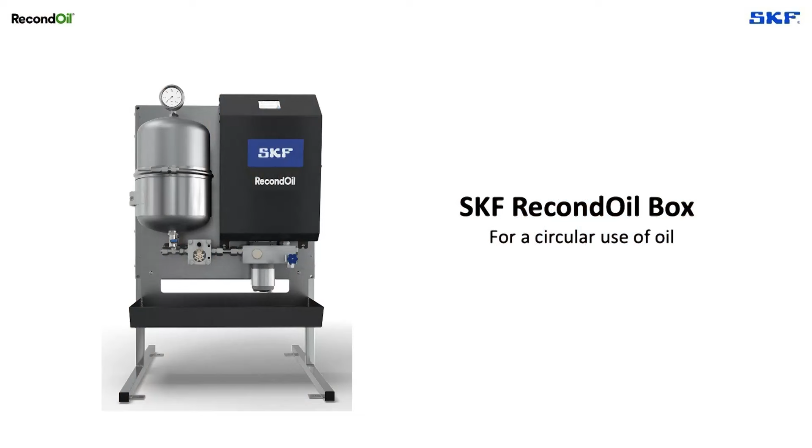Hi, here we have the new RecondOil Box. This box is an oil cleaning unit where we have a part with a hood, including a display unit, a motor and pump, and a sensor block where we can control and monitor the oil quality and the cleaning capacity. We have also inlet and outlet of the oil on the right side, which makes it quite easy to install and commission the system. We have the filter housing, where we have the technology since 30 years back with the standard depth filter, and today also we can combine this with the DST technology that cleans down to nano size level, where we can enable true circular use of oil.

This unit has some key features when it comes to size and installation properties. We have a spill tray, we have detachable legs so we can install the unit on brackets on a wall. And the only tool you need when it comes to service is a 14mm wrench. That's it. And this unit, as you hear, is quite quiet. So with the new features that we have incorporated in the developed product, we really can see that functionality and the noise level is on a very good level. With the new SKF RecondOil Box, we can enable true circular use of oil, and with that also minimize the carbon footprint.

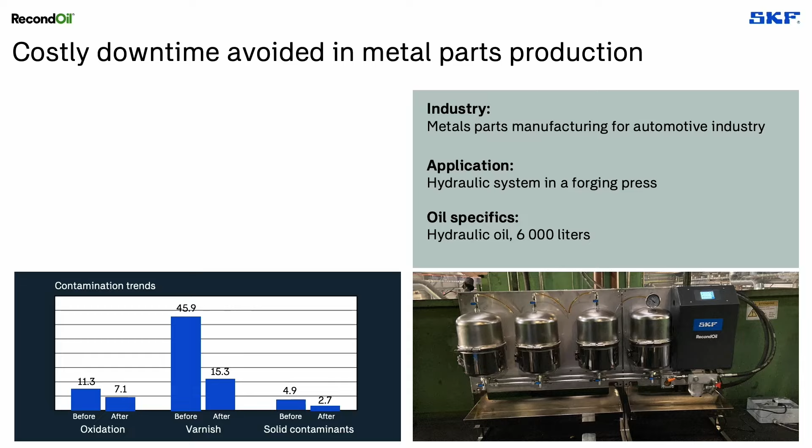2 years. In 2023, we installed a RecondOil Box with the latest DST technology to reduce particle and varnish contamination and to keep the oil constantly clean. 3 months later, the oil was back to optimal condition, and varnish and overall number of particles were significantly reduced.

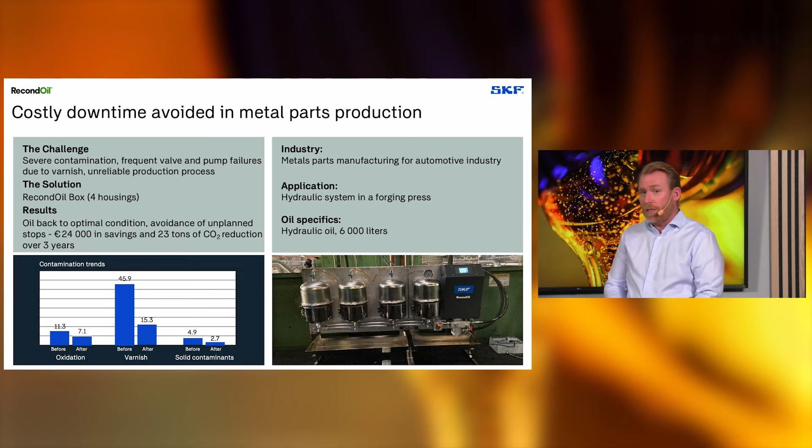And the results were so good that the customer actually decided to sign a 3-year oil as a service contract with us. And for these 3 years, the customer estimates that they will save around 24,000 euros for this single forging press. And that is after the investment. And reduce at least 23 tons of CO2 equivalents.

And of course, which is an indirect effect and benefit that comes with this, you can also see that they will benefit from a much more reliable and productive manufacturing process. Yeah, very impressive results. What's the main takeaway from this case?

Well, it shows that you not only get a sustainable use of the oil, but the savings on the indirect costs can be many, many times the oil cost savings. And that also, of course, again, the main benefit is increased reliability and productivity. Good. And I know you have another case for us as well.

Sure, exactly. And the next case I would like to show is actually an example where the actual oil cost is significant and becomes the most important saving. This is a customer from Spain who is a packaging producer in the pulp and paper industry.

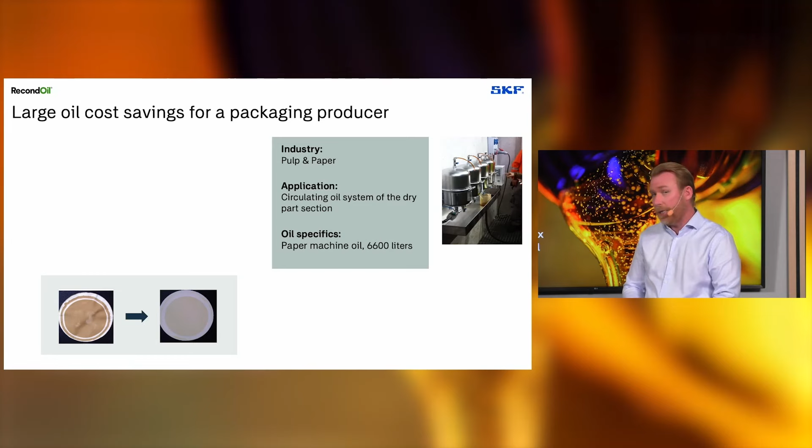And they faced problems with varnish in the circulating oil of this paper machine, and that led the oil to degrade quickly and to a point where it needed to be changed. And this is a premium synthetic oil that is very expensive to replace, and even though the recommendation from the oil supplier was to actually change the oil, we deployed our RecondOil Box solution to try to save the oil.

And after 4 months with the RecondOil Box running, the oil was restored to an acceptable level, and it didn't need to be replaced in the end. The customer now saves 60,000 euros from this avoided oil change and 24 tons of CO2 equivalents.

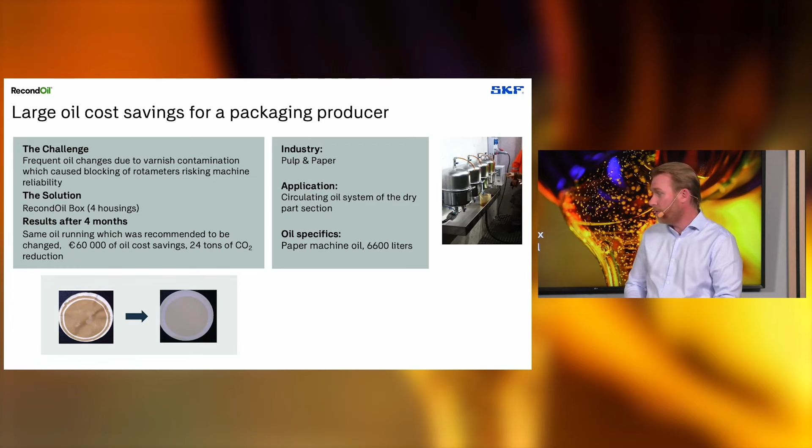But not only this, you also see the indirect effect of removing varnish also leads to better reliability in the process, and hopefully then avoiding unplanned shutdowns and damage of components in the process.

And finally, I would like to show a customer case from the energy sector. And this is an interesting case because it shows that the customer's maintenance related to changing the oil can be greatly reduced with our solution. And these are sometimes costs one does not initially think of as being linked to oil contamination.

And this is a customer from Finland who has a power plant that refines waste into power. They have a critical hydraulic system that controls the boiler grates in the process. And the hydraulic oil was contaminated and degraded by heat. The oil was almost end of life and was about to be changed.

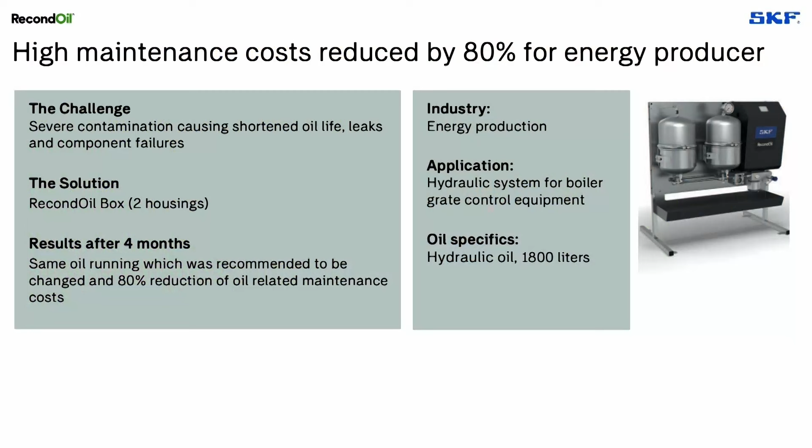So we installed a RecondOil Box and tried to save the oil. And since then, in 2022, they have been using the same oil, and they have also prevented leaks thanks to the seals working better in the system with a continuously clean oil.

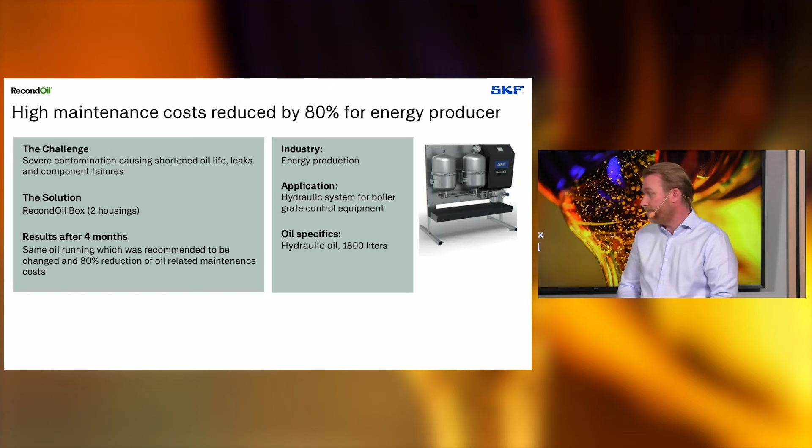And the big win, again, is the maintenance costs. They have been able to reduce them by as much as 80%. Thank you, Gustav. Very interesting 3 cases, and it seems when listening to you that these 3 cases show that our solution can actually address a large number of different challenges for the customers, be it sustainability, be it direct oil costs or even indirect costs, and the problems that you have due to dirty oil.

So, very interesting. Now, we will listen to one of our customers, Smurfit Kappa, and what they have to say about RecondOil. This is a customer with whom we have had very good collaboration, and they have had the RecondOil Box installed in their paper production processes for almost 2 years now.

Hello, José Luis, and thank you so much for being here today and sharing your experiences from using RecondOil within Smurfit Kappa in Spain. It's great to have you here. Thank you, Lisa. All right, so let's get going. To start with, maybe you can share with us a little bit about Smurfit Kappa as a company and your role within the company. Yes.

My name is José Luis Vaquero, and I've been working in Smurfit Kappa for 22 years. And the last 14 years, I'm in charge of maintenance in Sangüesa Mill in Navarra, Spain. Smurfit Kappa is a global provider of paper-based packaging. We are 47,000 employees in 36 countries.

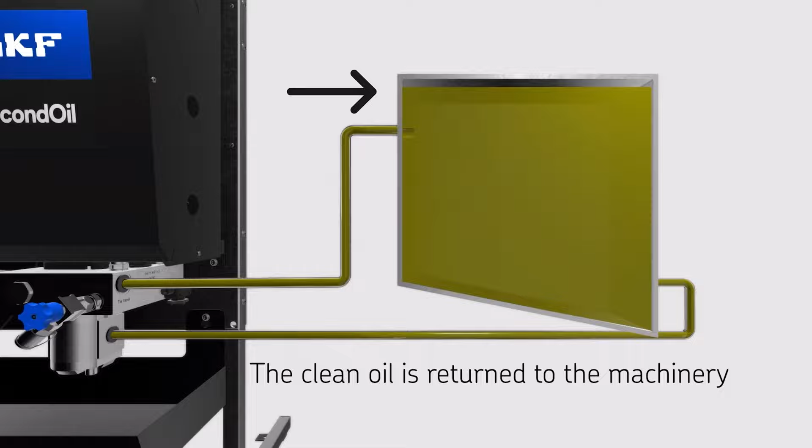You might be curious about how all of this works in a little bit more detail. What is really our double separation technology that enables the nano cleaning of the oil? Now, I've been joined by one of my colleagues, Aldara. Can you just say briefly a few words about who you are?

Thanks, Lisa. Yes, of course. My name is Aldara Naveira, and I'm responsible for technology development and delivery in Recond Oil. That means from the R&D activities related to our double separation technology all the way to the implementation and technical support and service to customers. I've been with Recond Oil almost 4 years now, I think. I think so, yes. Thank you, Aldara.

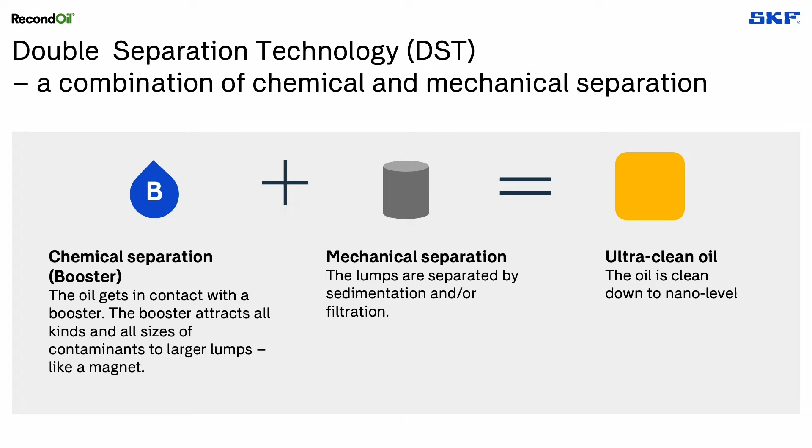So I leave it to you then to tell us a little bit more about double separation technology and how it works. Yes, and I hope to do that quite short and concise for the time we have. The double separation technology, as the name says, combines a chemical separation booster, that is our uniqueness, with different mechanical separation processes depending on the DST solution that we offer to the market.

When we think about the Recond Oil Box, for example, what we do is apply our separation booster into the cellulose depth filter. Our booster then gets in contact with the oil when it's flowing through this filter, and it's removing all types of contaminants. And why is it so unique, our separation booster? Well, as Gustav has mentioned before, it can remove all types of contaminants independently of the size. So we can go down to the nano level, and we also remove the bigger particles.

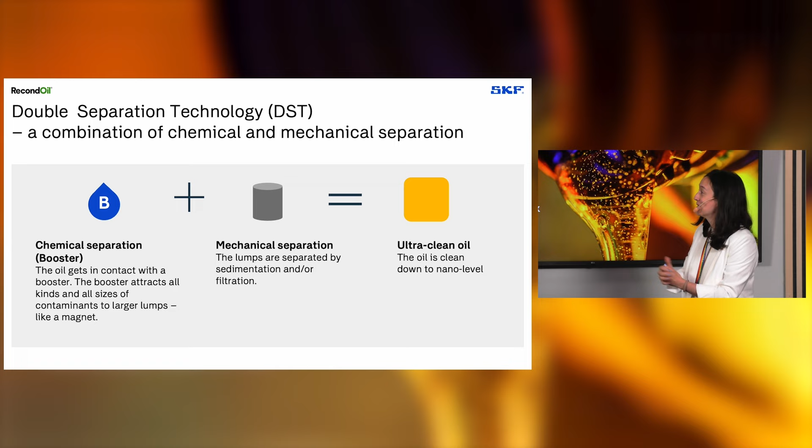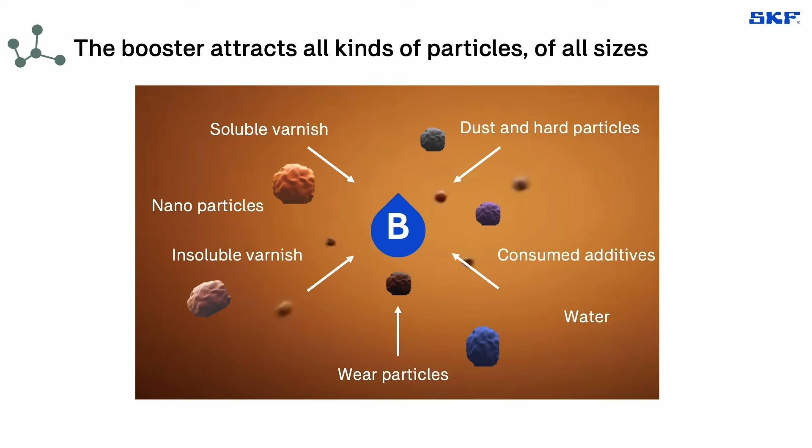That's a question we sometimes get. How does it do that? I think there's beauty in simplicity with this technology, and the booster acts like a chemical magnet, basically, and it attracts these contaminants by polarity. So that allows it to tackle, for example, metal particles coming from wear processes, soluble and insoluble varnish, and water contaminants. And others less known, for example, depleted additives that can be present in the oil and can be quite damaging sometimes, as some of those species can be corrosive.

So how we do this is, as I said, the booster gets in contact with the oil and it's removing it constantly. And what we can achieve with this is to maintain the oil always in optimal lubrication conditions. And what this actually means is what we have in the slide, where we look at the case from seals. As Gustav mentioned before, one of our customers has seen the advantages of our technology in their energy production, where one of the main effects they have seen is that the performance of their sealing is much better.

So what I'm showing you here is a heavy-duty seal testing for industrial seals that we have done in collaboration with our colleagues in Judenburg. What you can see in the black line is the regular behavior of an oil with an inline filter. So a full flow filter is cleaning that oil of the bigger particles at all times. And what you see in green is actually what you can achieve with the Recond Oil Box solution.

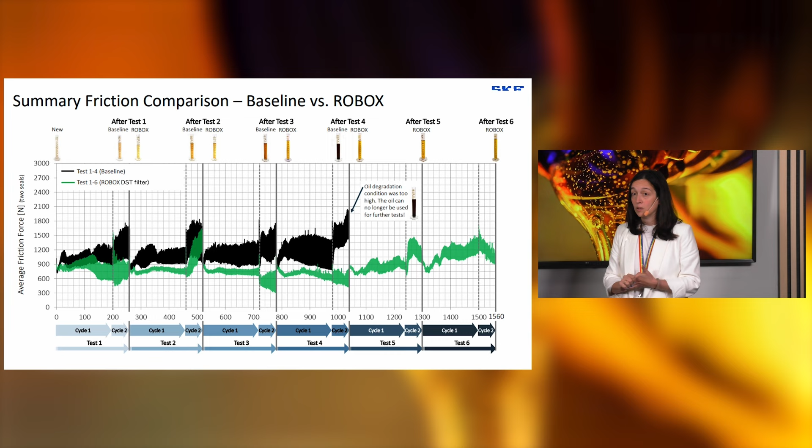So what you see here is, first of all, that we have effectively doubled the life of the oil. The last part of the regular testing that you see here, it's a fail test. There's too much friction, there's too much leakage and too much damage to the seals.

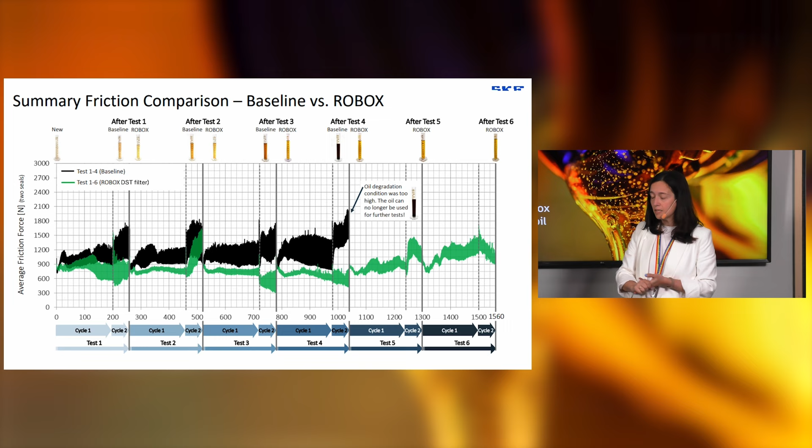And with the Recond Oil Box, we are basically cleaning 1% of the oil every minute. It's a kidney solution. But with just that small percentage, our system is so effective that, as you can see, it just continues and maintains this top lubrication performance of the oil at all times.

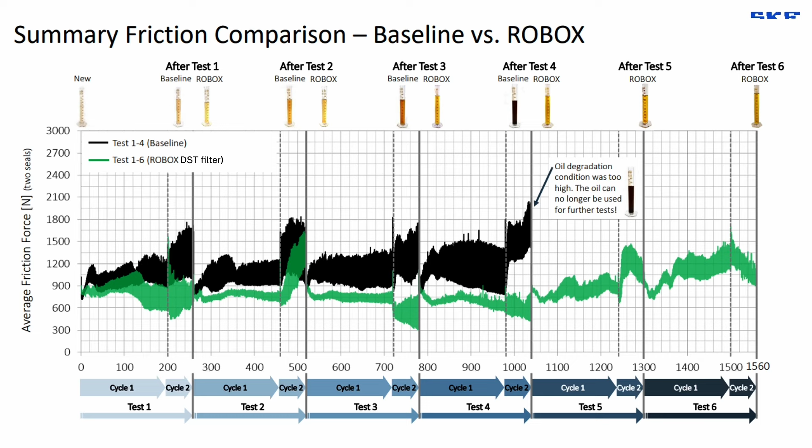And what are the results? As we see, longer life of the oil, double in this case when we stopped the testing, more than 96% reduction in the CO2 emissions linked to this process, and an average reduction in friction of minus 35%. As you can see, that depends a little bit on the cycle and on the conditions. And here is, let's say, the explanation behind the customer example that Gustav was talking about before.

Thank you, Aldara. It's interesting. It's so easy to think about the direct oil costs and the benefits that come with clean oil, but here we can see some really impressive results in terms of energy efficiency, etc. Yes, indeed. So very interesting.

If we then summarize a little, we can say that industrial companies can surely reduce their environmental impact, save a lot of money, improve the performance of their processes by just taking care of their oil and continuously cleaning it of impurities. If you manage to remove even the nano-small impurities that cause the oil to degrade, you can achieve circular use of oil, which means that you can use the same oil over and over again without having to buy new oil and replace the old one.

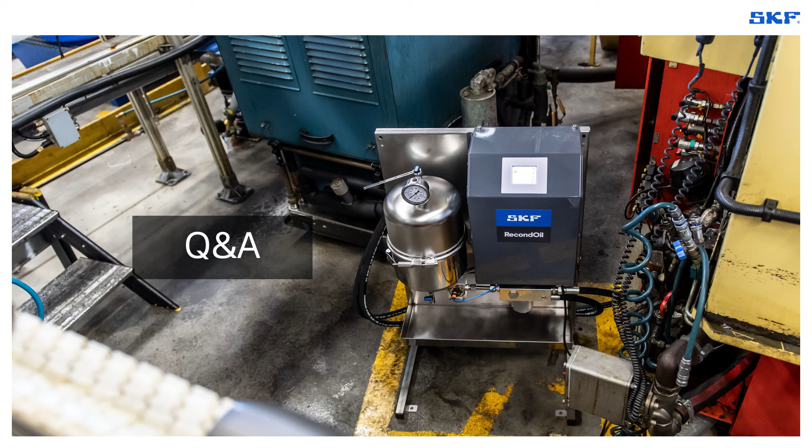Here's one from Andreas. It's about how fast will the oil be cleaned? I think this is for you, Gustav. Sure. So I know that for main filters, you often talk about speed or the flow speed. We are not so concerned about that. The flow speed is less important for our kidney loop system.

For us, it's more important that we size the system in the correct way so we take out more contaminants than actually are coming in to the solution. And we also need to allow time for the oil to run through our system to be able to capture these nanoparticles. So as long as we size the equipment correctly, we will make sure that we keep the oil continuously clean at all times.

Good. And then we have another one. We have been talking about varnish during the webinar today, Aldara. And here's a question: why is your solution better to clean out varnish than other solutions? Well, the secret resides with the booster, I would say, as we explained before. Varnish normally is not one substance, let's say. It's an agglomeration of substances derived from the degradation and contaminants in your oil. As I mentioned before, luckily most of them are polar substances. That's why our booster is so effective at taking them out.